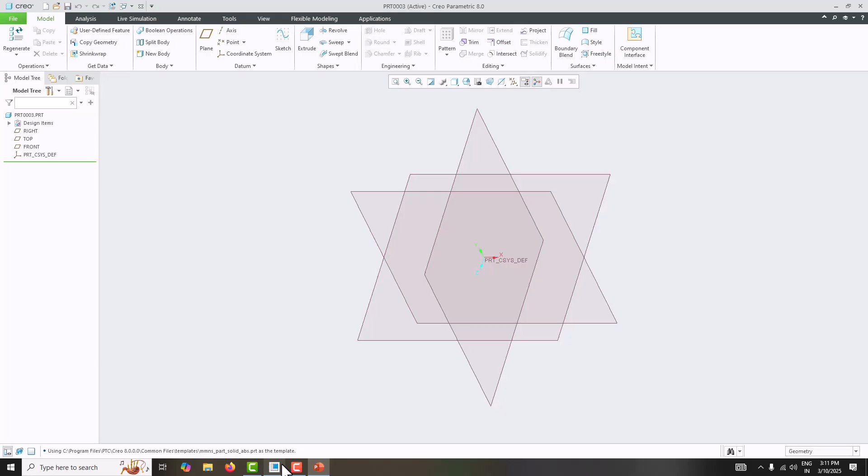Now we are using Creo Parametric 8.0. So this is the window for Creo Parametric 8.0. Now just go to the model dimensions. First we'll start with a circle with a radius of 102. Just select the front plane, sketch view. First create the center line, press the roller to confirm. Now we want to make a circle with a radius of 102 mm. Take the circle with center point, click here and click here, press the roller to confirm.

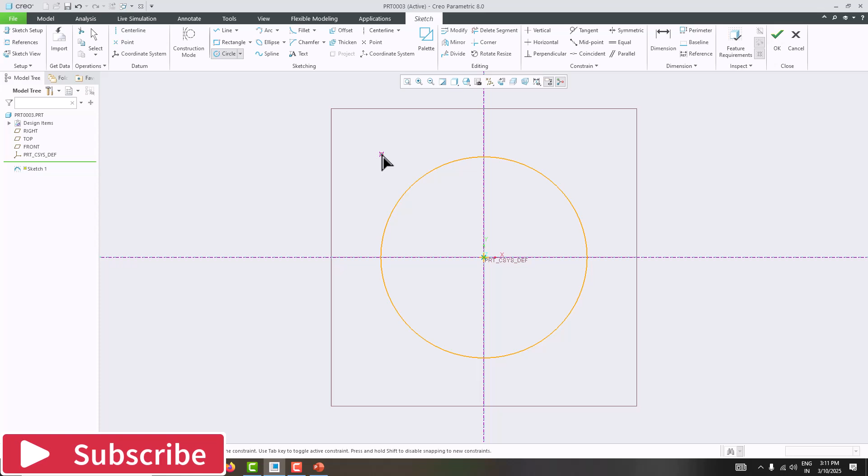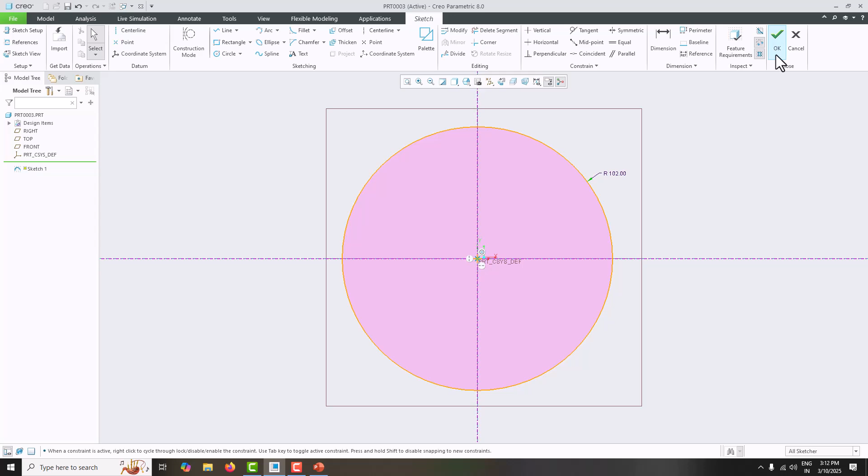Now we want to modify this dimension. Here they have given a radius of 102. So just go to the dimension, click it here and press the roller to confirm. Now the radius is 102. Press the roller to confirm. Now just move this dimension to here. Now we have created the circle. Just say OK. Then go for extrude. Just rotate the object to see what is happening.

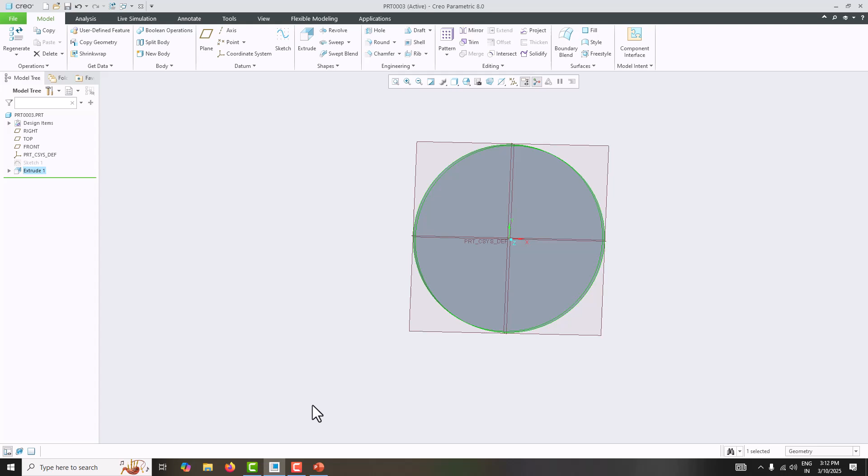Then go here. The thickness of the extrusion is 12 mm, as you can see in the side view. Just change this into symmetric and make it 12. Press enter. Say OK. Now we have created this circular plate. Then we want to create these cuts one by one. First we'll create this cut with a radius of 38 mm, and the center distance is 114 mm from the center point. Just go here, select the surface, sketch view.

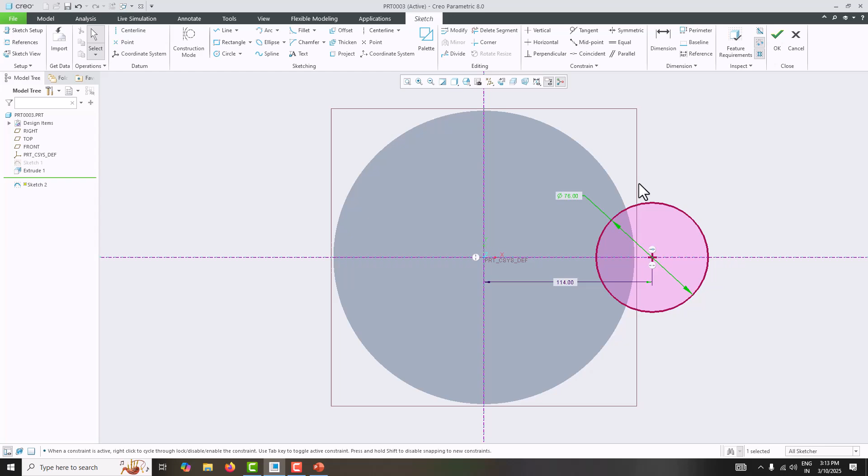Just take the center line, press the roller to confirm. Now just create the circle randomly. Don't make any constraint with the previous circle. Now we want to specify this one as 114, and this radius they have given 38. Just modify this into 76. 76 is the diameter. Here they have given a radius of 38, so just make it a diameter, which is 76.

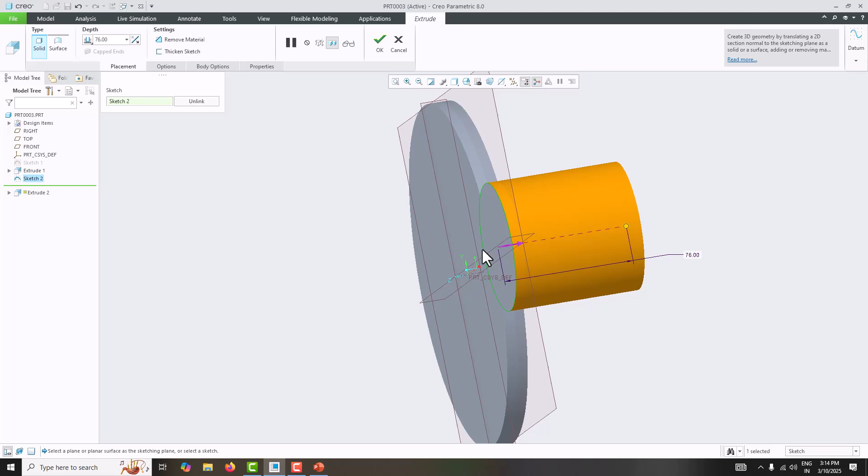Now just say OK. Then go to extrude. Just check what is happening. Now we want to cut the object. Change the direction to this side. It is making union. We want to remove material and cut up to next. Just say OK. Now the same feature has to be patterned 8 times.

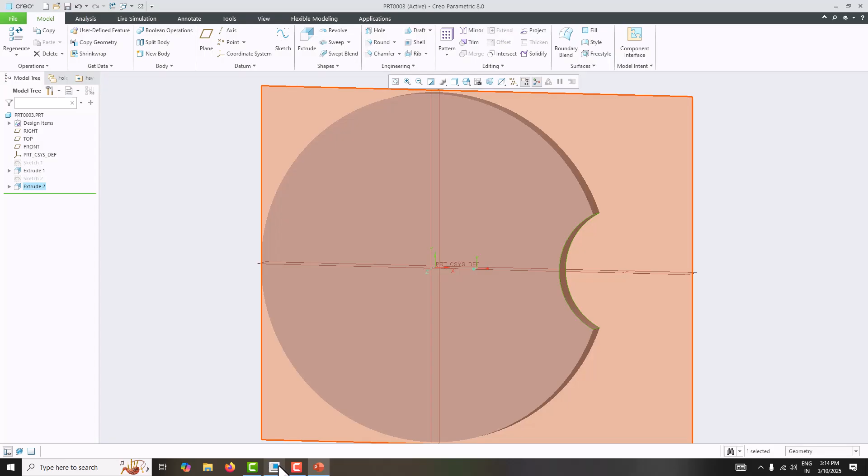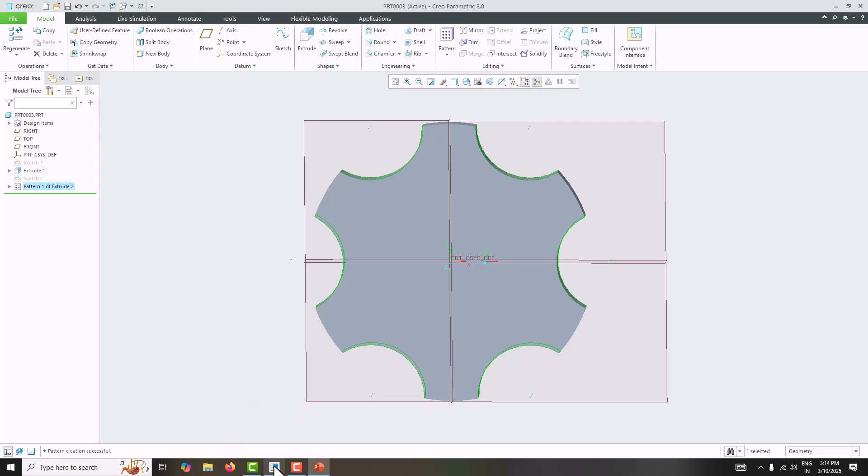So select this extrude and go for pattern. Here choose axis pattern, just rotate it. Here you can see the axis. Here we make it 8 patterns and click angular extent, then say OK. Now we have created this feature. Then go to the dimension again. Then we want to create this feature. For that, just go here, select the surface, sketch view.

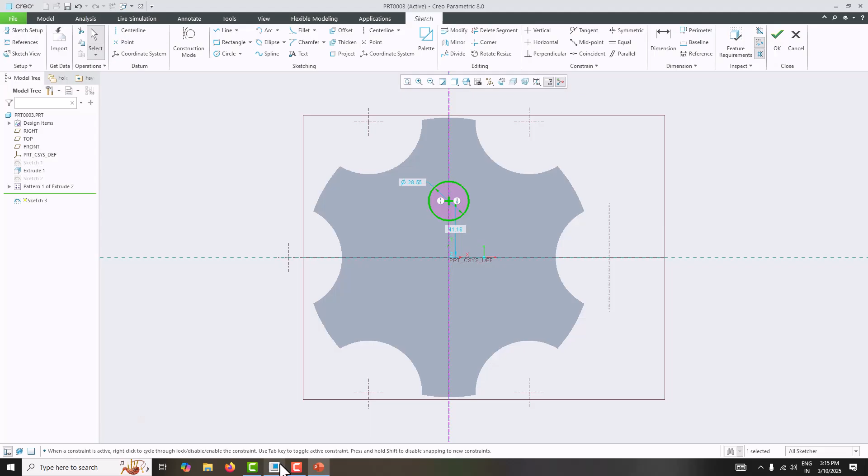First create a center line, then create one circle somewhere here. Here we want to specify the radius of the circle is 9 mm and the center of the circle is from here to here, which is 57 mm. Here you can see this is 57. This diameter is 9 plus 9, which is 18.

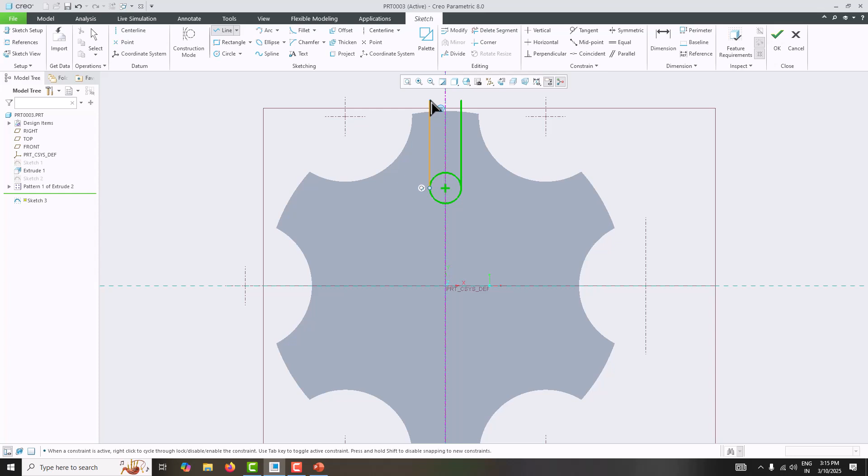Then just take a line. Here you can see the perpendicular line, it will automatically snap like a magnet. Just select it, place it somewhere here and press the roller to confirm. Similarly, click here, give equal length and close the sketch. Press the roller to confirm, again press the roller to confirm. Now you can see this is not a properly closed sketch. There is one more edge which is not required for this model. For that, just go for delete segments, select this edge and press the roller to confirm.

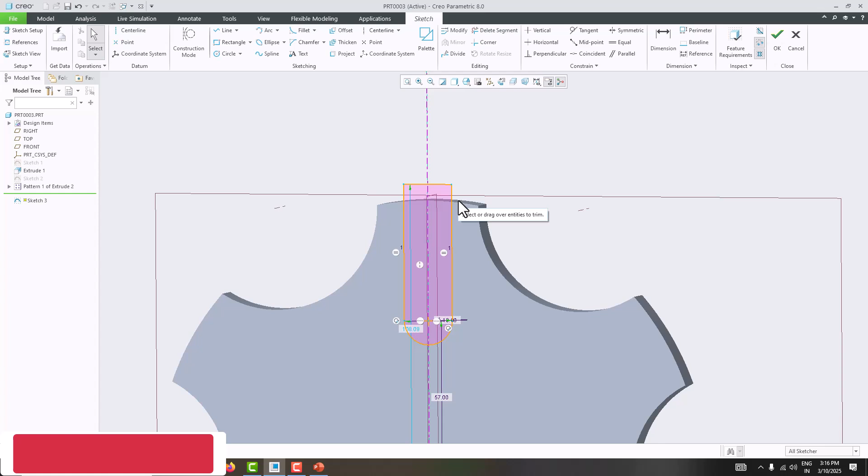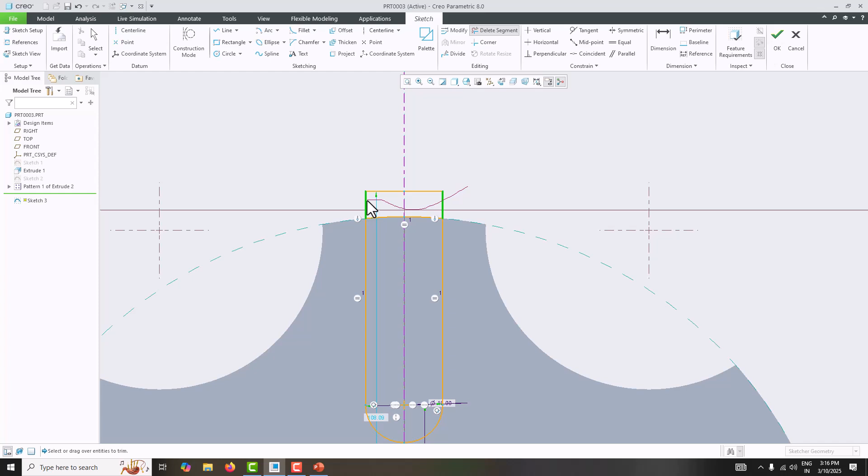Now this extra feature needs to be removed. For that, you want to constrain the sketch up to this. For that, take an arc with center and ends and click here. The first arc point is here and the second arc point is here. Press the roller to confirm. Now we want to remove these unwanted edges by using delete segments. Press the roller to confirm.

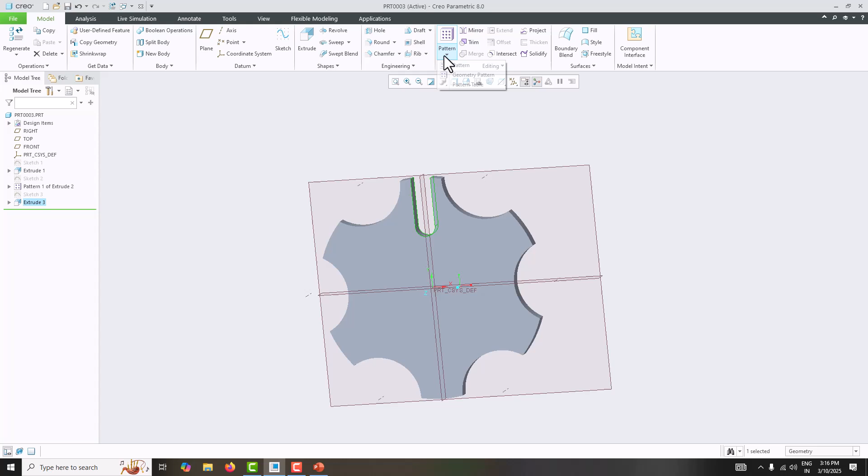Just say OK and extrude, change the direction. Now just click it here. To next, say OK. Now one feature we have done; the same feature has to be patterned 6 times. For that, just go for pattern, select axis pattern, and select this axis, and this is 6 times and 360 degrees, say OK. Now we got this feature.

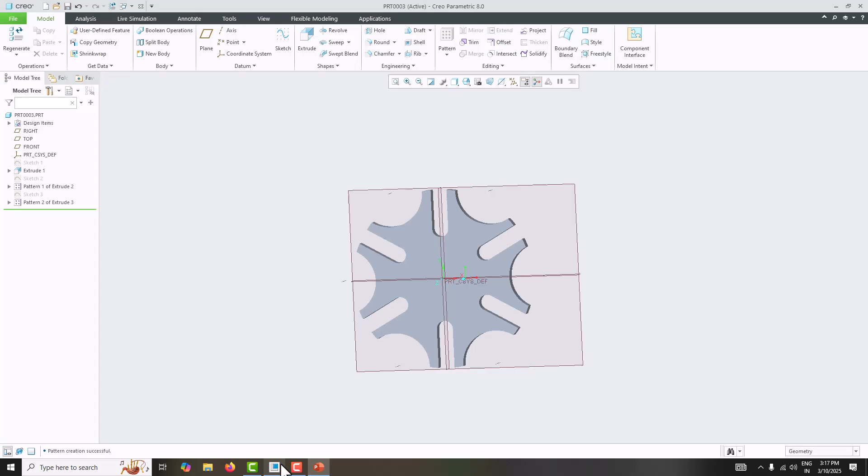Then we want to make this feature. For that, first create the circle with a diameter of 64 and extrude up to a length of 12 mm. Select the surface, sketch view, select the circle, create a circle, the diameter is 64, say OK, extrude 12 mm, say OK. Then we want to create a keyway cut. Here you can see the keyway cut we need to make.

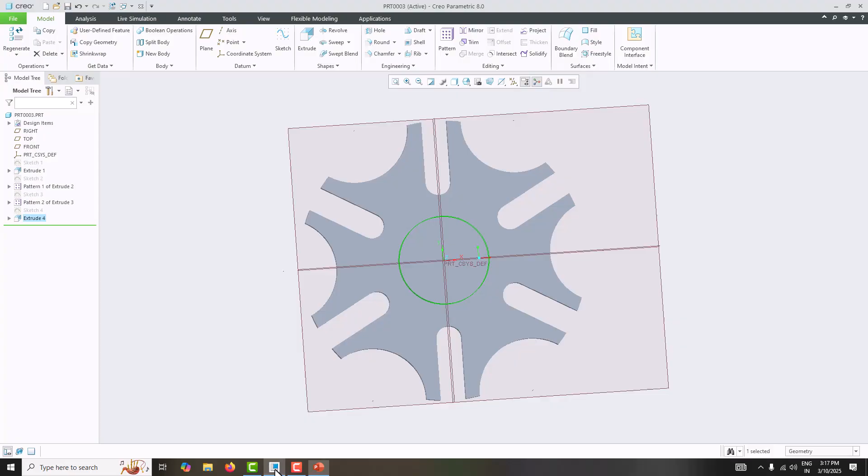For that, just create the sketch, select the surface, sketch view, go to reference, make the circle a reference, then close it. Take a circle, create one circle; the diameter of the circle, as you can see, is 38, and for the keyway, this one is 9 mm and this one is 5 mm. Just go here, the diameter is 38.

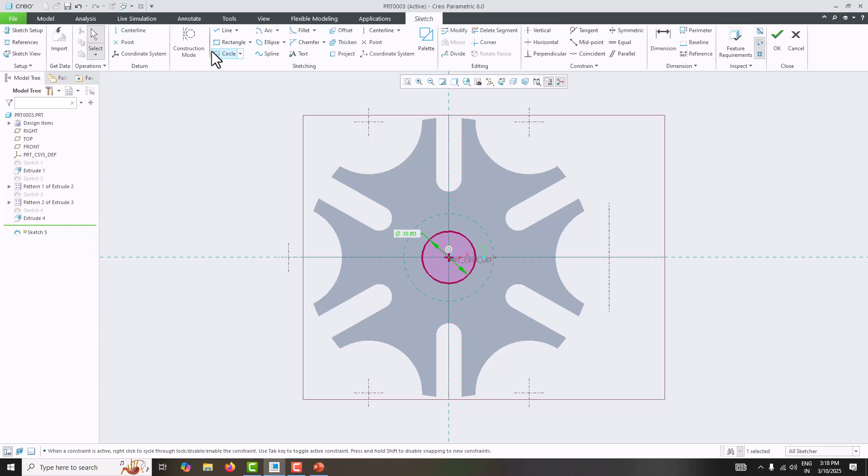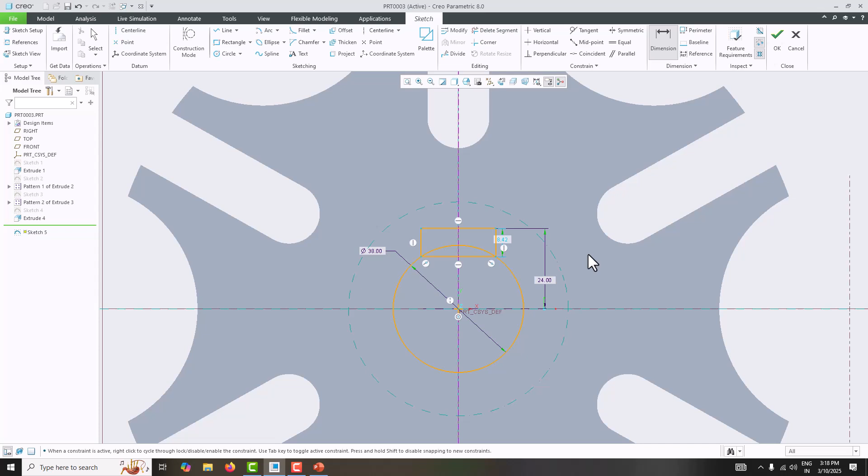And create a rectangle. Before that, just create the center line, press the roller to confirm, take a rectangle, and create a rectangle like this. They have given the dimension of 24 mm. Just go for this dimension from here to this distance, which is 24, and this dimension is 5 mm. Just remove it. This one is 5 mm and this width is 9 mm.

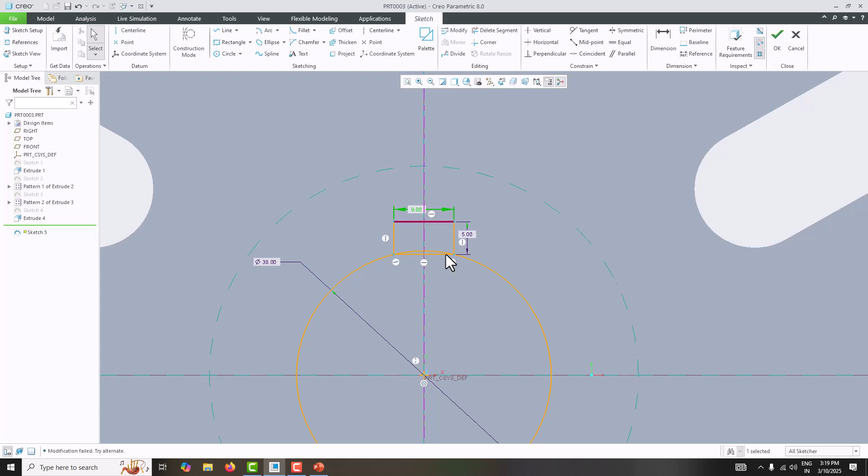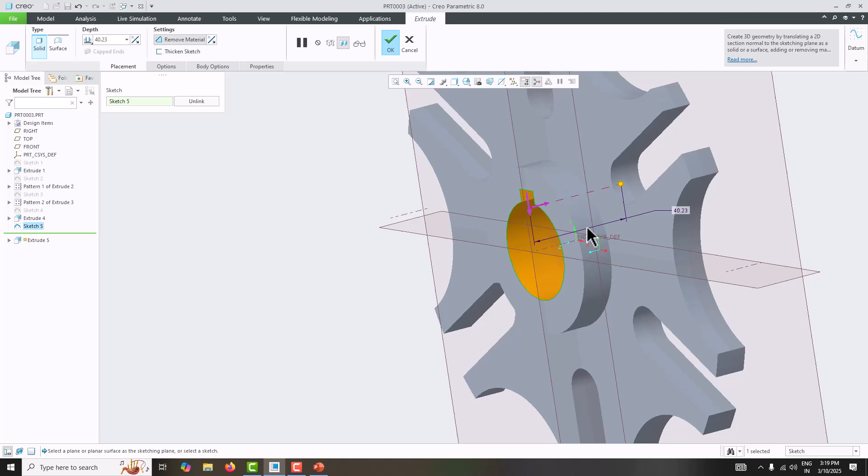So this is enough. Then go for delete segments, remove these unwanted segments and press the roller to confirm. Now we have created this keyway sketch, then say OK, then go for extrude, change the direction to this side, make it to next, material removal, say OK. Now just go here, hide all the planes, default orientation, and make it wireframe edges. So in this way we can create this object.

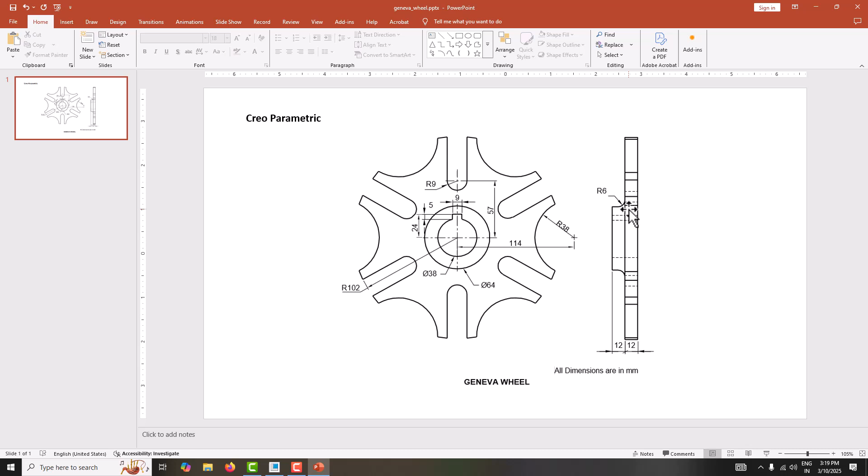One more feature which is missing is the round with a radius of R6. Just go here, choose round, select this edge, the radius is 6 mm, say OK. Just go here, default orientation. Now we have created this complete object using Creo Parametric.